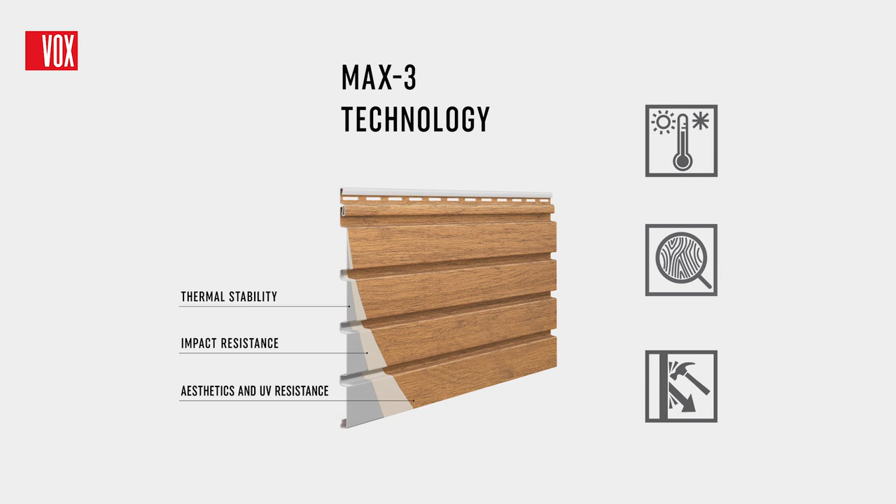The panels were made using the innovative Max 3 technology, which resulted in a profile that is extremely resistant to mechanical damage and large temperature fluctuations. The panels are available with wood-like decors and wood-like decors with dark joints, which further emphasize the 3D effect on the wall.

For proper installation, you will need basic tools such as a spirit level, tape measure, square, scissors, hammer, knife, pencil, drill and power tools such as a drill driver and chop saw. For sawing, a saw blade designed for cutting aluminium will be best. Panels can be cut with a chop saw, circular saw or angle grinder.

Depending on the structure on which the installation will be carried out, you will need screws for wood or metal. Detailed installation instructions, available in each package and on the website, will be an indispensable aid.

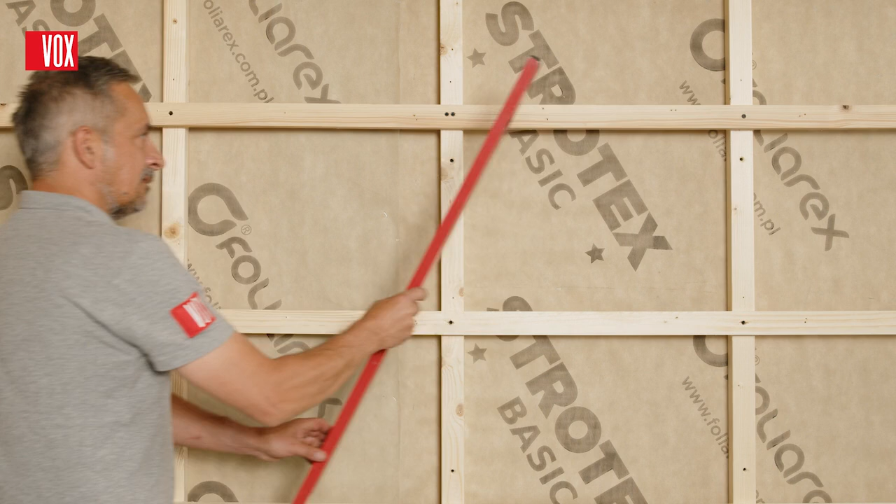The first step in facade installation is the preparation of the substructure. This is a labor-intensive operation that takes up 70% to 80% of the total installation time. However, a correctly executed substructure guarantees the correct completion of the facade and an excellent end result. The substructure also allows for adequate air circulation between the wall and the facade.

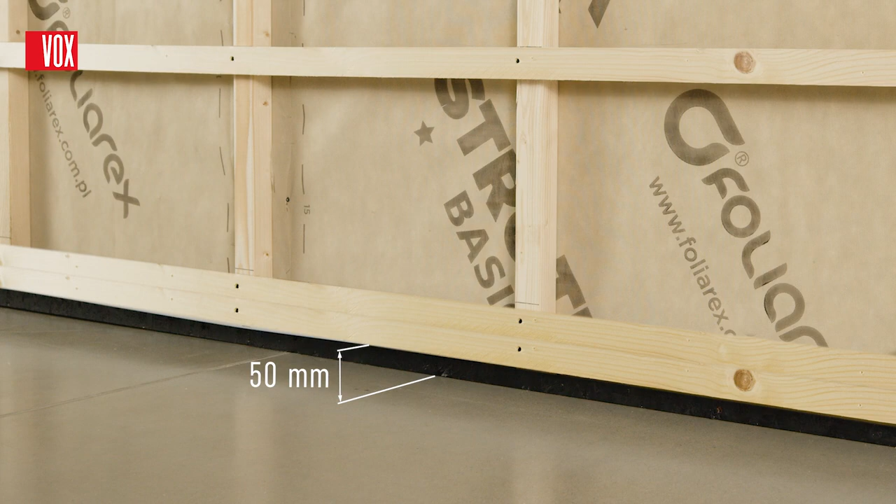For this purpose, the substructure must be installed at a height of at least 50 mm from ground level, with at least 20 mm of space left at the top edge of the wall. The same values should be maintained for the installation of trims and panels. For the substructure, you can use wooden battens or metal profiles. The spacing between the battens or profiles to which the panels will be directly fixed should be a maximum of 40 cm from center to center of the batten or profile.

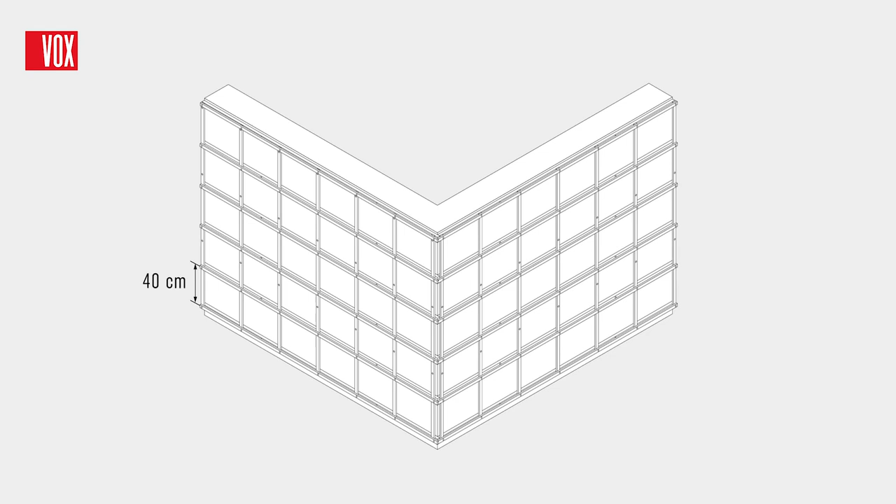To prepare a wooden frame, use wooden battens, which should be made of good quality wood, knot free, impregnated, and with a moisture content of 15 to 17%. The battens should have dimensions of at least 30 by 22 mm. Use 35 mm screws for wood to fix the panels to the wooden substructure.

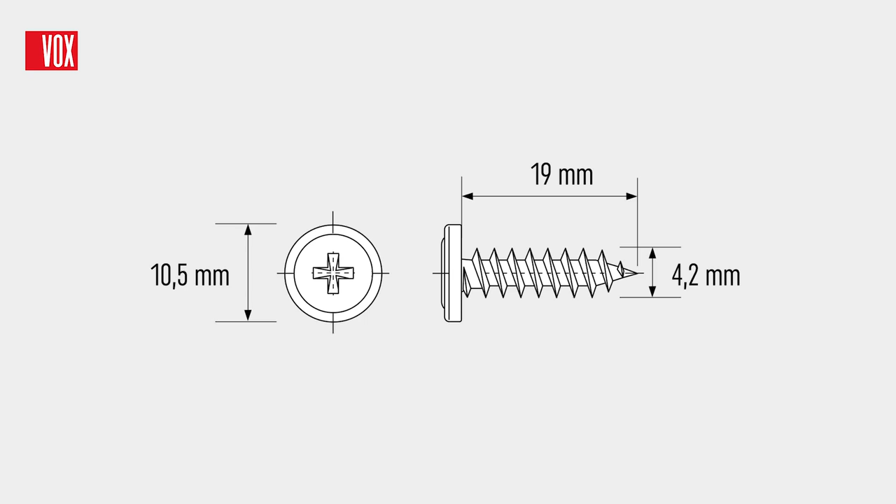First install the horizontal battens along the length of the building, spacing them according to the type of insulation used. Then fill the space between the battens with insulating material and place the vapor barrier membrane on top. If you plan to install the panels horizontally, the next step is to install the vertical battens, which will be the base for installing the panels and provide ventilation space between the wall and the panels. Install them at a maximum distance of 40 cm from the center to the center of the batten.

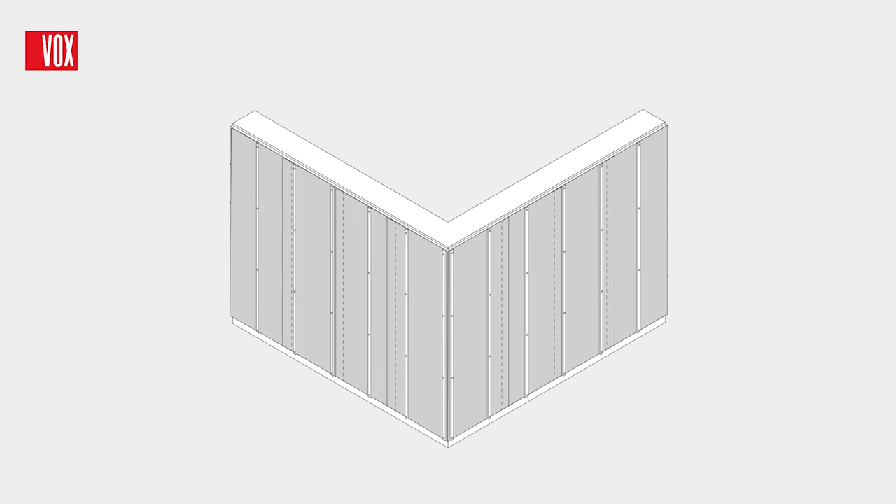If you plan to install the panels vertically, the vertical battens installed on the insulation layer may have a spacing of more than 40 cm, as the horizontal battens, which will serve as a base for the installation of the panels, with a spacing of no more than 40 cm, will be fixed to them.

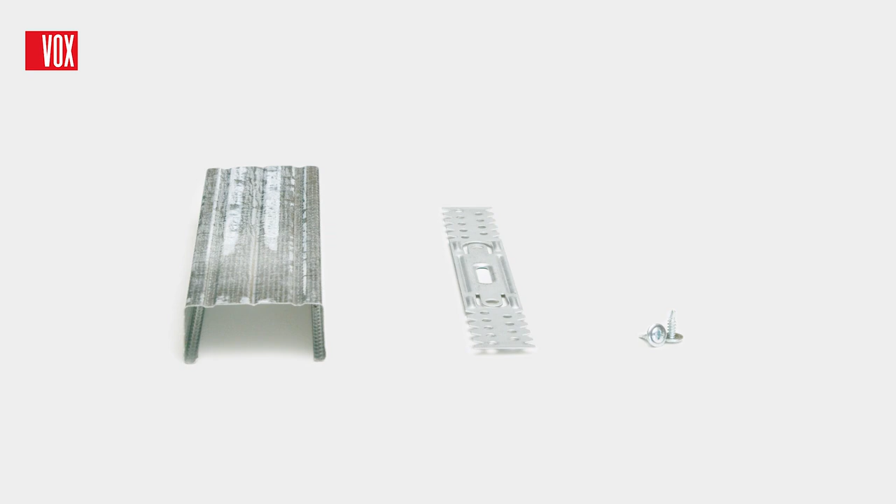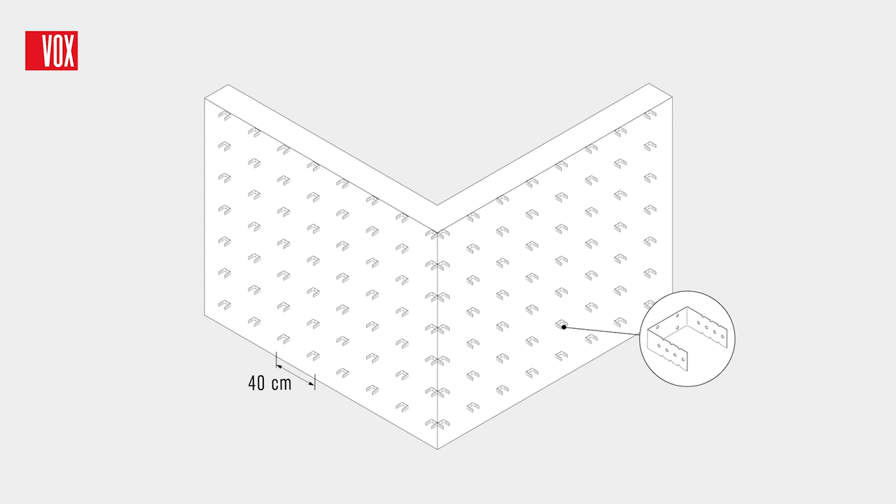To prepare a metal frame, use metal profiles, e.g. the CD100 with a height of 48 mm or CD60 with a height of 27 mm. When installing horizontally, the preparation of the metal frame starts with the fastening of the fastening hooks, which enable the vertical installation of the metal profiles to the wall with a maximum distance of 40 cm from the center to the center of the profile.

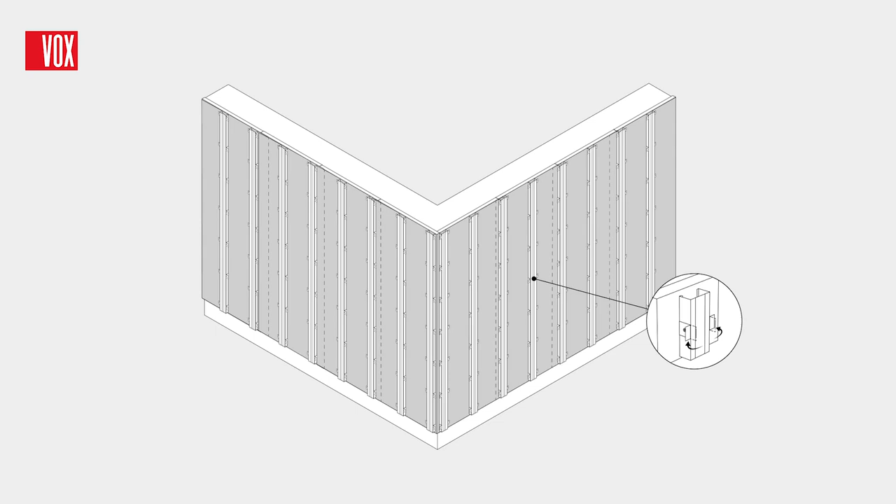Next, apply thermal insulation to the attached hook and puncture it. A vapor barrier membrane is applied to the thermal insulation, and then metal profiles are attached to the fastening hooks, which will serve as a base for installing the panels horizontally and at the same time ensure adequate ventilation between the wall and the panels. The excess hook length should be bent, with the ends slightly entering the insulation so that it adheres properly to the wall.

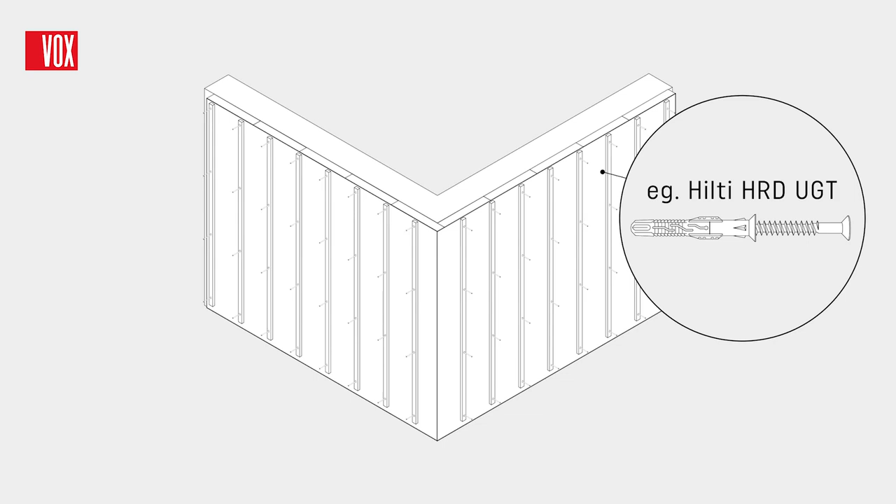If you plan to install the panels vertically, a layer of profiles laid horizontally with a maximum distance of 40 cm between them must be installed on top of the vertical profiles, which in this case can be spaced more than 40 cm apart. When installing the panels on a wall insulated with expanded polystyrene foam and bonded with adhesive with an embedded mesh, it is necessary to fix the substructure battens with dedicated mounting anchors, such as Hilti HRD-UGT.

The installation of the Fronto Max panels is made easier by a series of matching trims. First of all, we have the SV11 starting trim, needed to start the horizontal installation. Then the corners, the SVP12 outer corner, which can be used for panels installed both vertically and horizontally, and for finishing window and door openings.

The Mini SVP 12.5 outer corner is a more subtle alternative to the SVP 12 trim, and can also be used for outer corners in both vertical and horizontal installation. We also have the SVP 12V outer corner for vertical installation dedicated exclusively to panels installed vertically. This corner is flush with the surface of the panels, which is why it must be placed inside the SVP 15 trims fitted horizontally on the lower and upper edge of the wall.

The SVP 14N trim is used with the SVP 19 facade trim to finish off window and door openings and to reinforce cut panel edges. The SVPJ trim is very commonly used for finishing the edges at the top and side of the wall, as well as in the inner corners or as a starting trim for vertical installation. The SVP18 connector is used to join panels installed horizontally lengthwise.

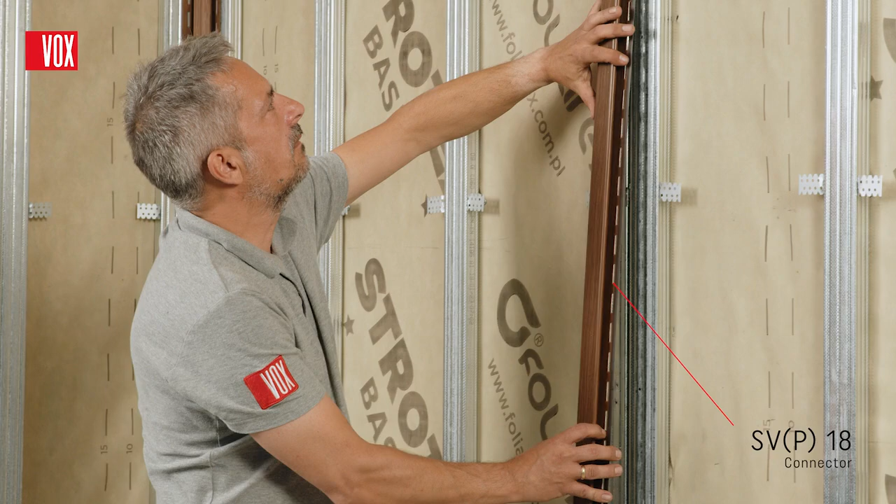The SVP 16.5 drip edge trim is used to channel water away from the building wall and, in combination with the SVP 15 trim, makes it possible to join panels installed vertically height-wise. The SVP 19 large facade trim, in combination with the SVP 14 trim, is used to finish off window and door openings and to neatly cover substructures. The SV17 small facade trim has similar uses to the SVP19 large facade trim.

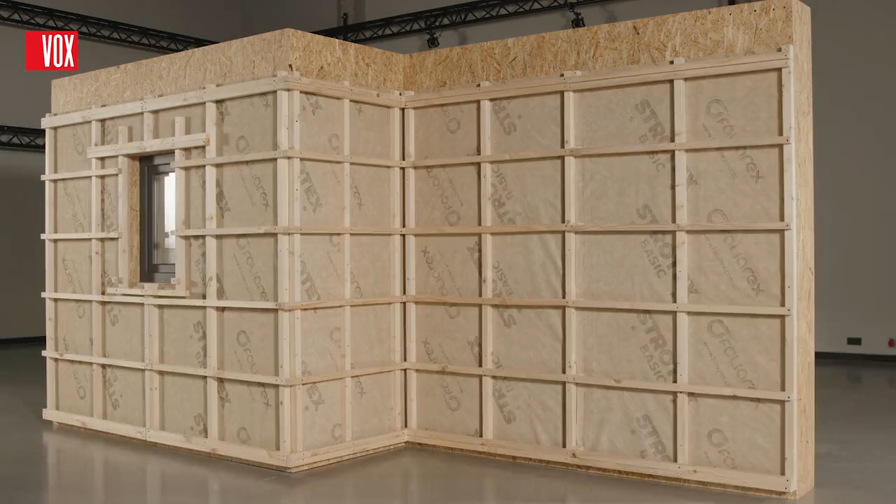Fronto Max is designed to be used as a finish for a ventilated facade. A ventilated facade requires open airflow between the wall and the facade product, which is why it is necessary to provide an air inlet and outlet at the bottom and at the top of the wall. Ensure that there is at least 50 mm between ground level and the bottom edge of the panels, and a minimum of 20 mm at the top edge of the wall. A ventilation gap between the panels and the facade of at least 22 mm is necessary, depending on the altitude and latitude, as indicated in detail in the installation instructions.

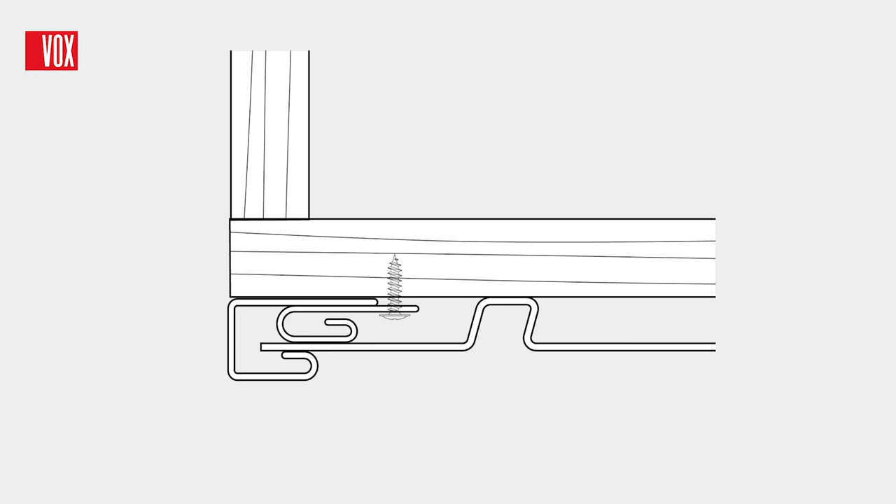The need for adequate expansion joints is related to the expansion and contraction of the panels under the influence of the ambient temperature. The size of the joint depends on the ambient conditions and the temperature during the installation. These values are precisely defined in the installation instructions available on the website.

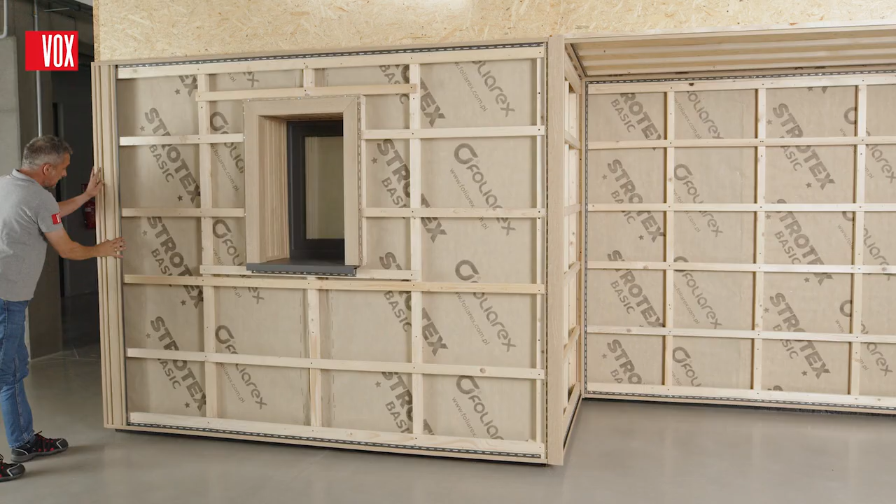A so-called fixing point is only used when the panels are installed vertically to stabilize the direction of contraction and expansion due to the ambient temperature. For the fixing point, it is best to choose the second batten from the top or the middle batten. This will prevent the panel from moving uncontrollably. Depending on where on the batten the mounting hole is, the following fixing methods are possible. At the edges of the mounting hole, between the mounting holes, or at the edges of adjacent mounting holes.

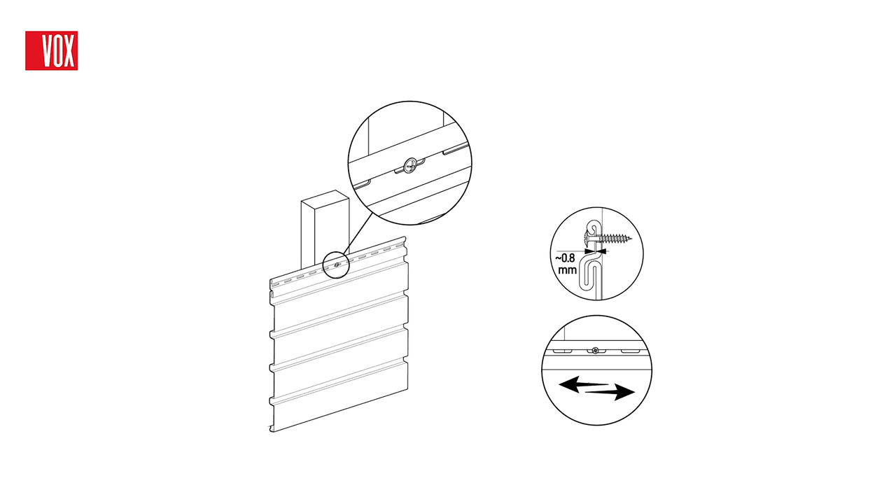The panel is fixed by screwing the screws into the mounting holes. Try to place the screws in the middle of the mounting holes and do not tighten them all the way, leaving slack for the panel to move.

For vertical installation, the Fronto Max panels are fixed to horizontal profiles, or, as in our case, to wooden substructure battens. Before starting to install the panels, level and screw on the trims. A perforated profile can be installed at the bottom of the substructure to protect the wall against insects and pests, and to ensure proper air circulation. The SV11 starting trim at the bottom of the wall is not used for vertical installation. This is replaced by the SVP15 trim, in which several holes can be drilled for water drainage.

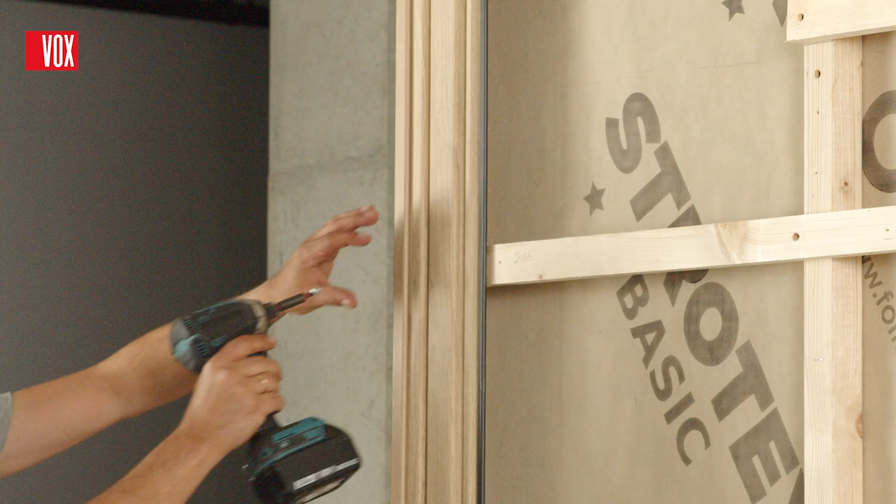The panels should be installed from left to right. Measure the required length of the panel, remembering to keep a suitable expansion joint in the trims. Cut the first panel to length and slide it into the SVP15 trims on the side at the top and at the bottom of the wall. Level and then fix the panel with 2 screws on the second batten from the top. On the other battens, fasten the screws as standard in the middle of the mounting holes and do not tighten them all the way.

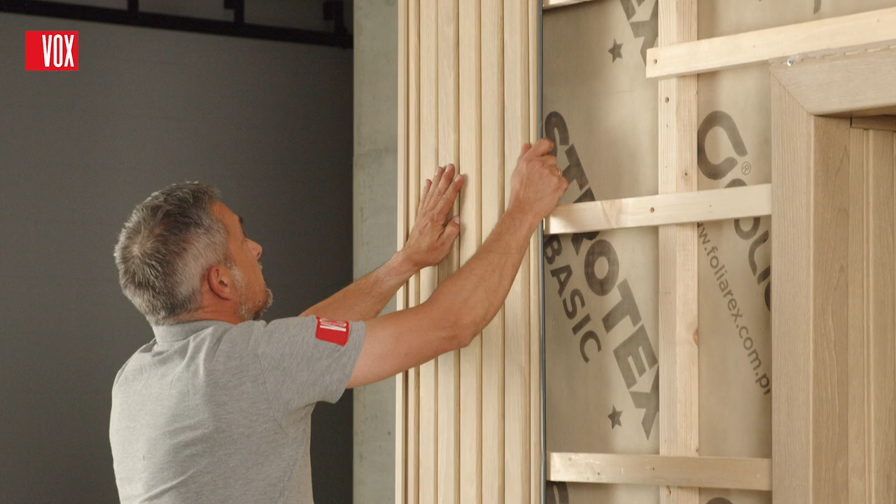Each successive panel is hooked over the lock of the previous one, which is made easier by the click lock, and also fixed on the second batten from the top. The subsequent panels are fixed in the same way.

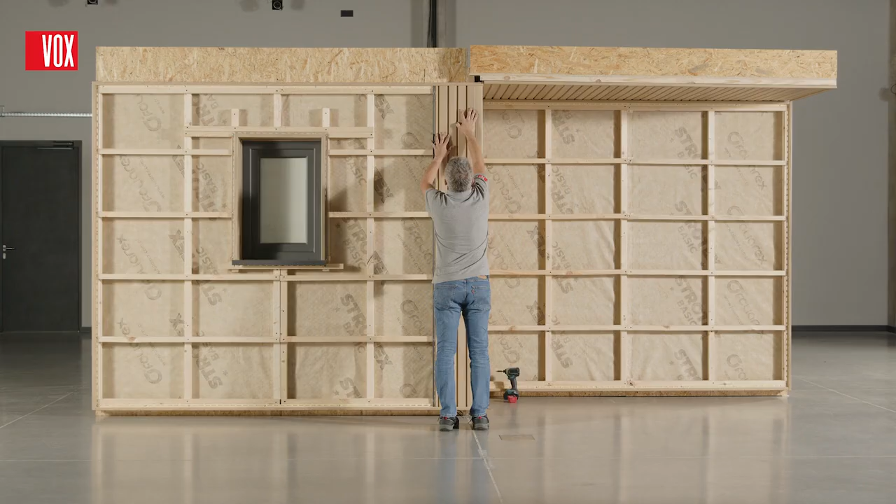When using the SVP12V outer corner, installation begins by hooking the panels into the locks in the trim. The panels are then screwed to the substructure battens. The last panel often needs trimming. If this is the case, cut to the required width, hook into the lock of the penultimate panel.

If, as in our case, there is a need to support the cut edge, use the previously cut panel lock or the SVP14 trim for this purpose. As an option, you can also make additional perforation holes along the trimmed edge of the last panel to act as hooks, preventing the panel from falling out of the trim.

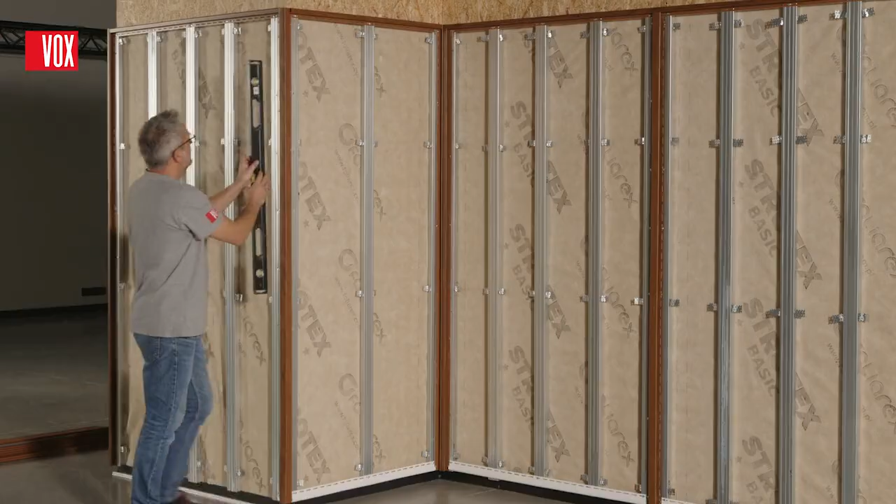For horizontal installation, the Fronto Max panels are fixed to vertically laid battens, or, as in this case, to metal substructure profiles. The actual installation of the slats starts with the leveling and fixing of the vertical trims. A perforated profile can be installed at the bottom of the substructure to protect the wall against insects and pests and to ensure proper air circulation.

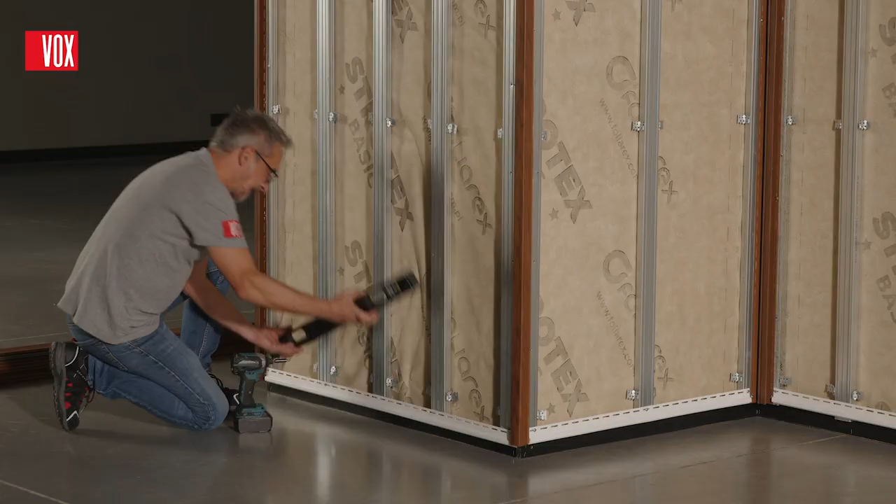Next, install the SV11 starting trim needed to install the panels horizontally. All the trims must be accurately leveled using a spirit level to ensure that the panels are installed correctly. When determining the length to which the panels must be cut, remember to maintain the correct expansion gap in the trims. The panels should be installed from the bottom up.

The first panel is clipped into the starting trim and slid into the vertical trims. It is very important that the panel can move in the trims. To ensure this, position it more or less in the middle, i.e., with the same expansion gap on both sides. Then fasten the panel with screws. Try to place the screws in the middle of the mounting hole and do not tighten them to allow the panel to move.

The subsequent panels are clipped into the lock of the preceding panel. The panel is correctly installed when you hear the distinctive click of the lock. Thanks to the click locks, once assembled, the panel is firmly in place and will not fall down. This allows you to reach freely for tools and install the panel without additional assistance. Each subsequent panel is installed in the same way.

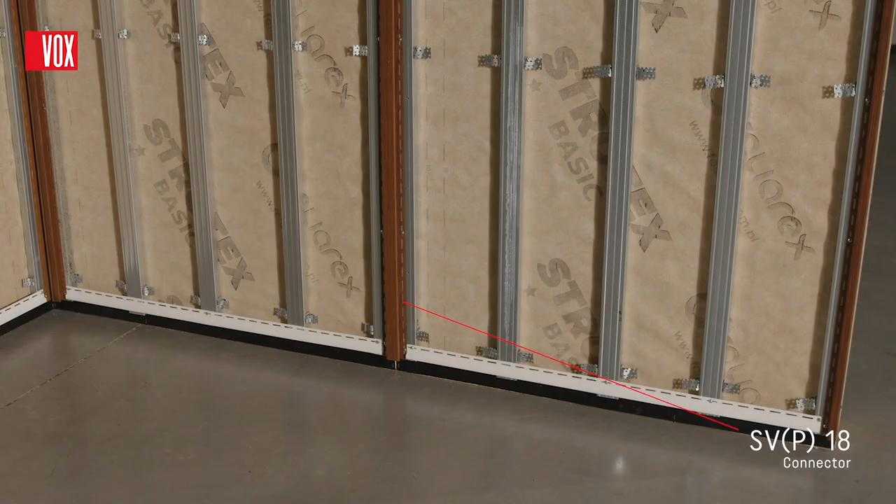The slats installed horizontally are joined lengthwise using the SVP18 connector. Joining with this trim will be necessary for wall lengths of more than 3 meters. The joint location must be planned before installation and the connector trim fixed on a double or, if necessary, triple batten.

The last panel often does not fit in its entirety. Therefore, you must measure the distance between the edge of the lock and the inside of the trim pocket and cut it to height accordingly. Use the cut-off lock as a support and place it in the SVP15 trim.

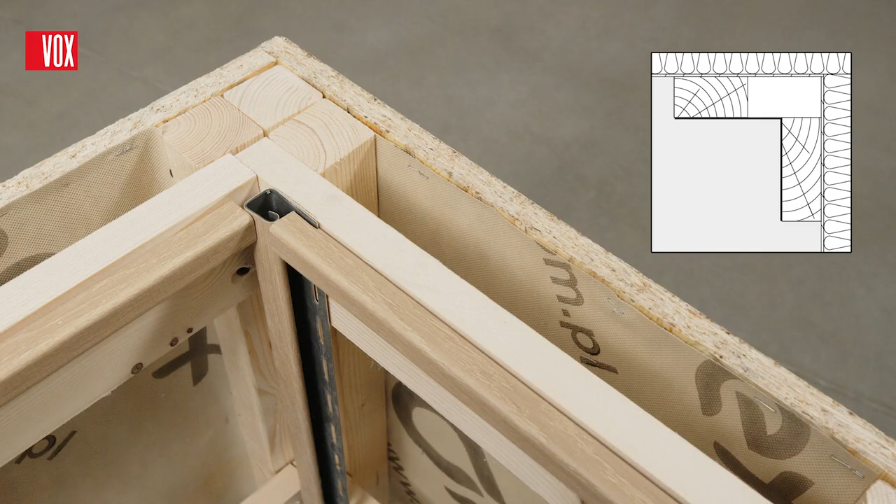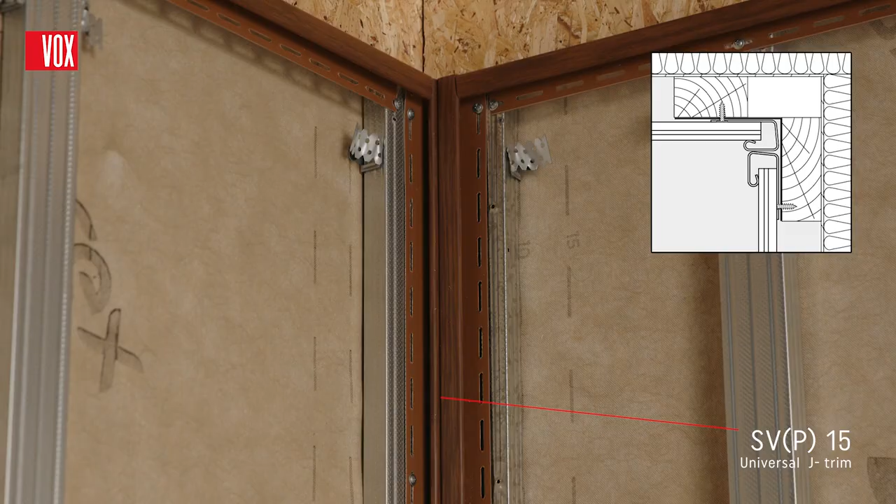You can use 1 or 2 J-trims in the inner corner. When using only one SVP15 trim, remember to leave space on the other wall of the corner so that the panel can be inserted there. When using 2 SVP15 trims, fix them to both sides of the corner. In order to effectively protect the inner corner from moisture, it is best to use waterproof film as additional protection.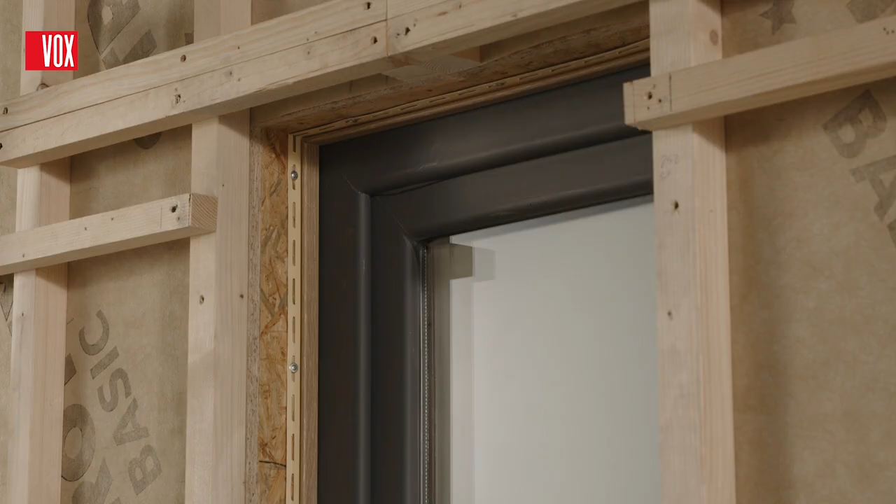To finish the window and door recesses, it is best to use the dedicated SVP19 large facade trim and the SVP14 end trim. At the inner and outer edges of the recess, install the battens or profiles to which the trim will be fixed. Inside the recess at the junction between the battens and the window or door frame, on both sides and at the top, install the SVP14 trim. The trim must be installed so that its pockets connect behind it.

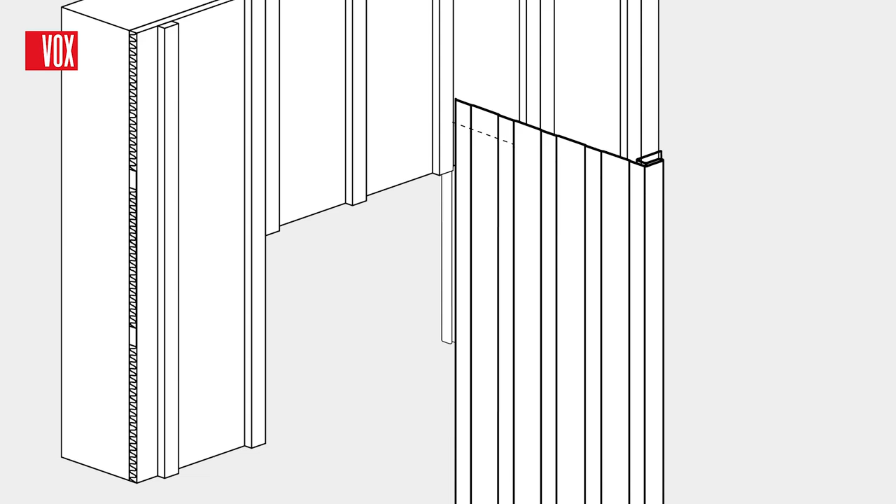The facade trim must be measured and cut so that it fits the dimensions of the opening and proper drainage is ensured, as described in the installation instructions. The trim sections prepared in this way are joined together and inserted into the window opening. The ends of the SVP19 trim sections are inserted into the SVP14 trim.

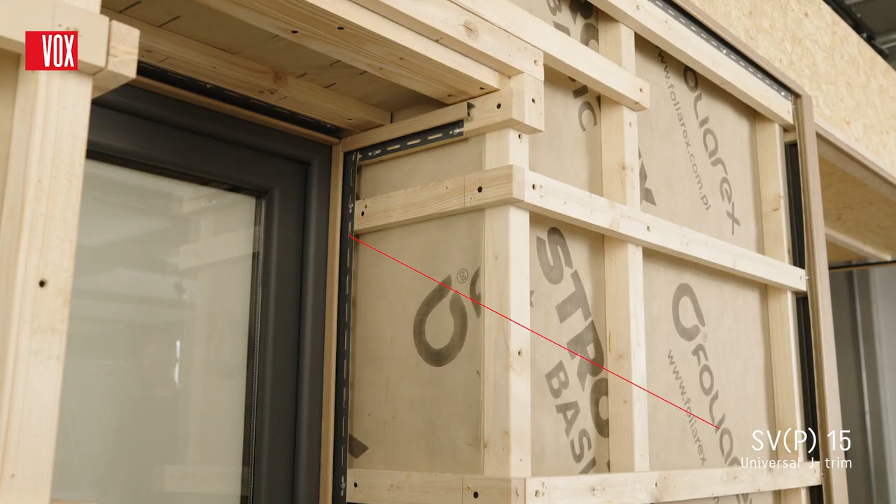Alternatively, the SVP12 outer corner and the SVP15 universal trim can be used. Inside the recess, at the junction between the battens and the frame of the window or door, on both sides and at the top, install the SVP15 trim. The SVP12 outer corner is fitted to the outer edge of the recess.

The outer corner sections need to be prepared so that water can flow into the drainage channels. The exact method of sizing and cutting the trim is shown in the installation instructions. This is what correctly cut corners should look like. They are connected in such a way that water can drain away from the facade.

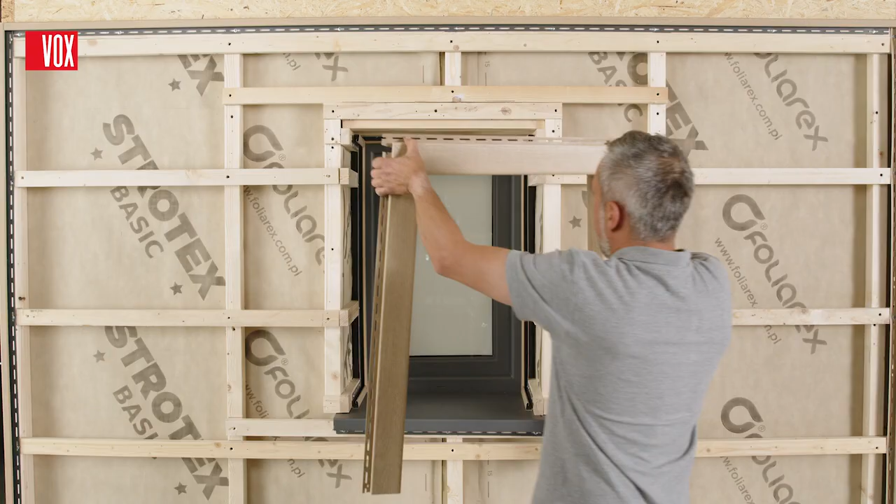The prepared trims are attached to the substructure at the outer edge of the recess. Once they have been secured, it is enough to place the panels cut to length in the pockets of the trims. When determining the length of the sections, remember about the expansion joints.

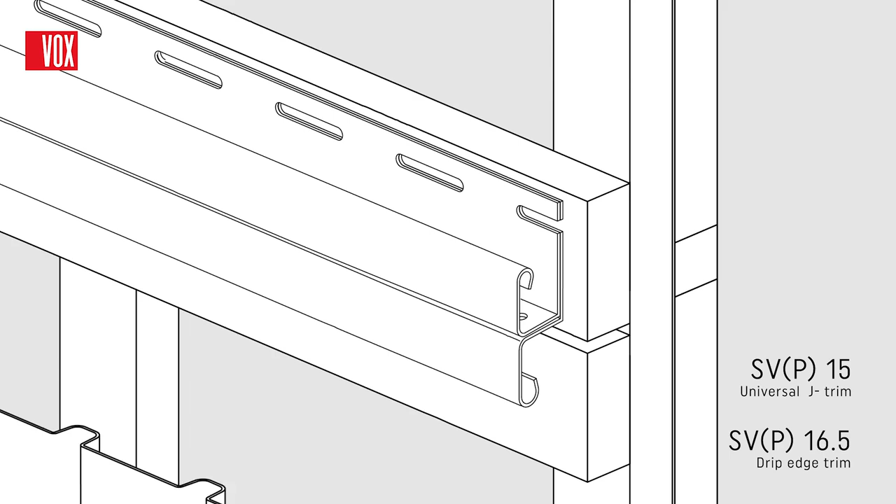Panels installed vertically are joined with the help of the SVP 16.5 drip edge trim and the SVP 15J trim. To do this, first install a drip edge trim over the top edge of the vertically installed panels, and then above it install a J trim, which will serve as a starting trim for the next row of panels. Water drainage holes can be pre-drilled in the J trim. The joint location should be planned before installation, and the substructure battens installed at the appropriate point.

For an aesthetically pleasing finish to the installation and to cover the substructure, the SVP19 facade trim can be used in combination with the SVP14N trim.

Fronto Max slats can be installed in the ceiling area, for example under a balcony or terrace roof. For this installation, a substructure with a maximum of 40 cm spacing between wooden battens or metal profiles from center to center is required. It is essential that the substructure is suitably level.

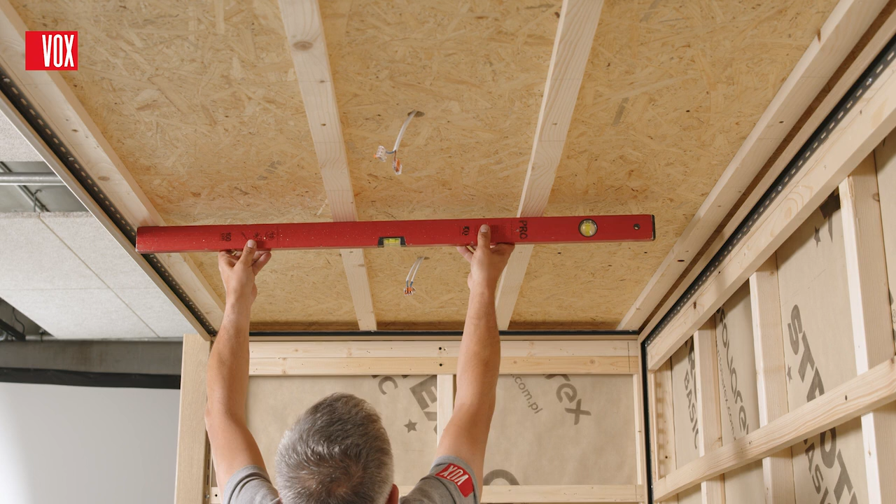It is possible to install lighting in the ceiling-mounted panels, but this should be planned during the substructure preparation stage. Electrical cables must be routed to the selected locations and holes drilled in the panels. The panels should be cut to length, with the expansion joints in the trims. Insert the first panel into the trims and screw it to the substructure so that it can move.

Each subsequent panel is installed in the same way. Feed the cables for the lights through the pre-drilled holes. The last panel should be cut to the required width, inserted into the trims and clicked into the lock. Finally, install the lights in the panels.

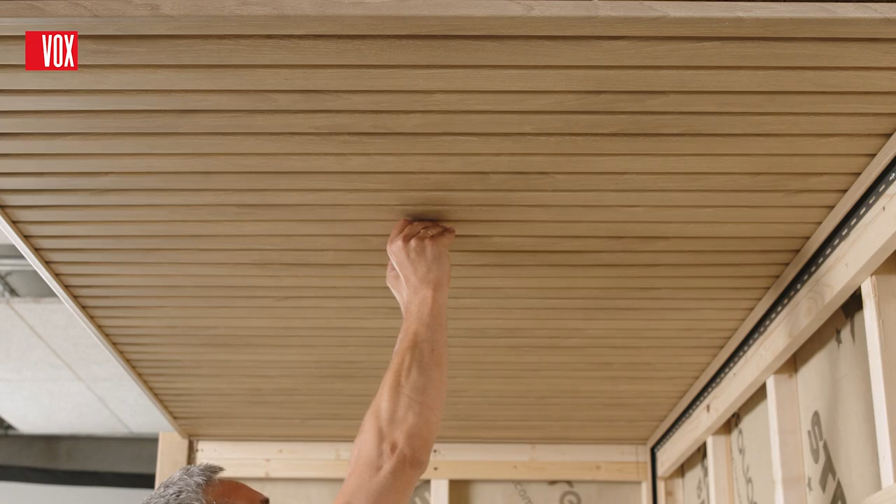After screwing the panels onto the ceiling, install the panels on the walls. In order to obtain a smooth transition from the ceiling to the wall, the panels on the wall have to be fitted in such a way that the joints meet in the same place. Once the installation is complete, it is a good idea to spray the finished facade with an anti-static agent and remove any dirt and dust.

If necessary, the Fronto Max panel facade can be cleaned with a detergent solution below 40 degrees Celsius and washed with water after cleaning. Do not use solvents or aggressive or corrosive liquids for cleaning. The installation rules shown in this video also apply to Max 3 SXP05 panels.

This video shows general rules and instructions for installation. Carefully read the detailed installation instructions included in the packaging and on the website before starting the installation. Installing the product contrary to the instructions may invalidate the warranty.